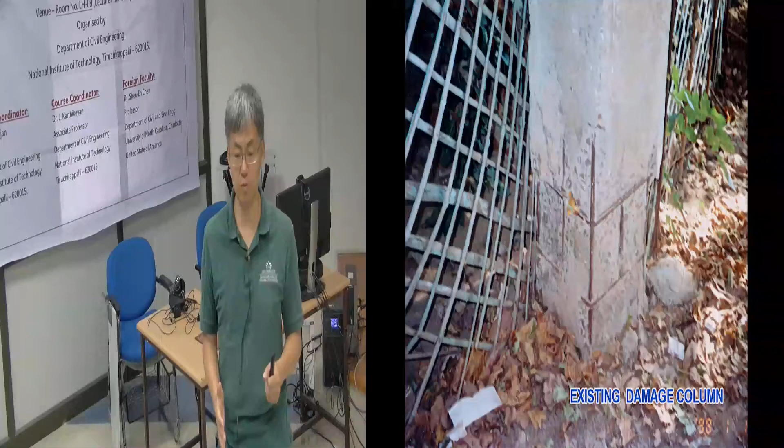So the craftsmanship here, if they pay attention, can do very, very good results. But you can see most of the concrete is gone, and all the rebars are exposed. So this may be a case where they don't have enough cover, rather than an actual rebar corrosion problem.

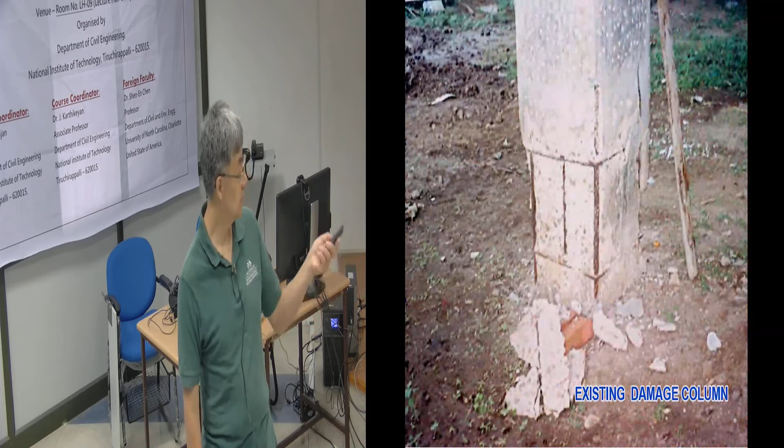In more cases, there are chunks of concrete, and we don't know if these chunks are coming from here or from above. The beams and the remaining structure, and even the bottom of the tank, all have chunks of concrete falling. So you have to do a forensic investigation to really determine where that concrete is coming from, and that is a very important part of the investigation.

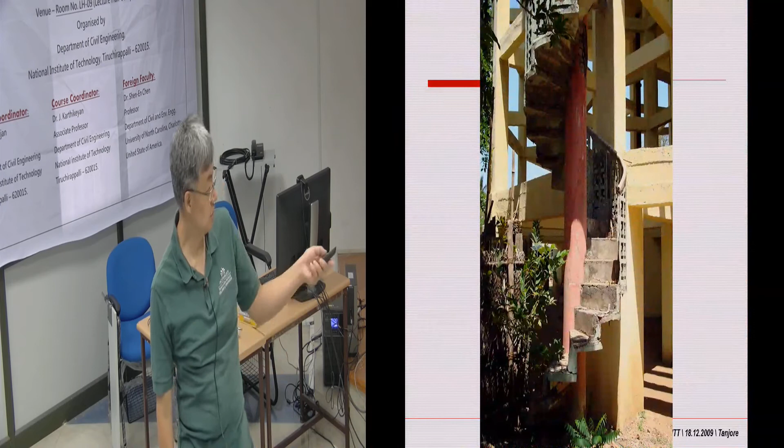This is the stairway that goes up to repair or do service to the tank. Now, compared to the beams and columns, this definitely has rebar exposure and problems. The stairway was not done as well as the structure itself. I don't know the sequence of construction here, this may have been done afterwards. Because of the geometric complexity, this may be something more difficult to construct, and that is why the quality of this is not as good as the actual structure.

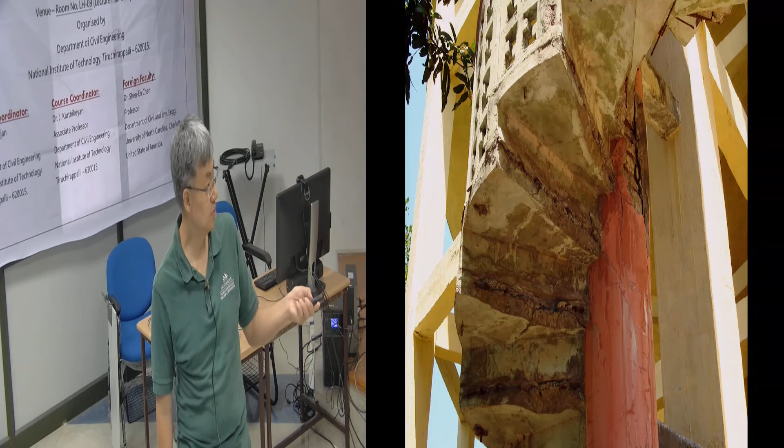And look at this. Compared to what we've seen before, this is bad concrete, and the steel was not proper either.

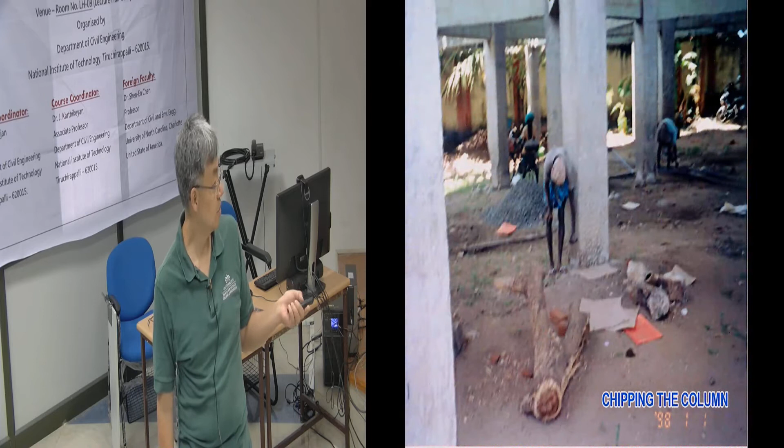So after they did the investigation, they started the repair work, and even this picture shows very good workmanship. They know that when you repair concrete, you should chip away all the old concrete, and then maybe enhance the reinforcement so that all the corroded parts are removed.

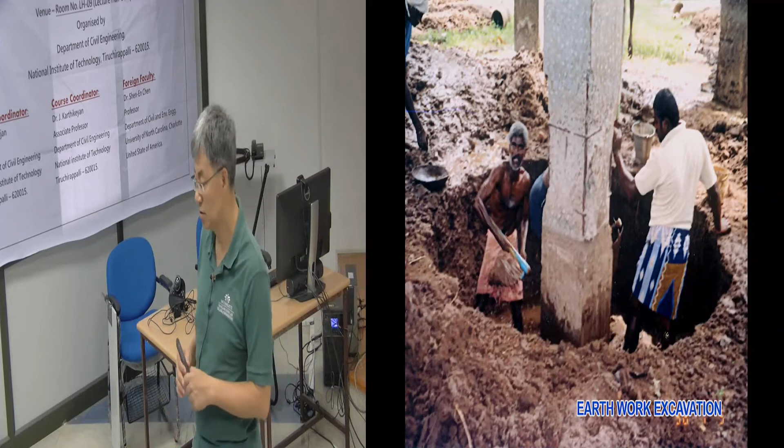And then they open up. So the recommendation that Dr. Shen gave them is actually to reinforce the columns by enlarging the columns, and the footing. So by excavating below ground, they have been able to repair most of the footing part.

Now, there is a danger in what they're doing. Notice that there is no secondary beam supporting the structure, and then they start digging out the foundations. This is very dangerous. If they start repairing all of them simultaneously, you're exposing people to danger.

So, from a construction safety perspective, this is something where they should give some prop to the columns. Yeah, exactly, some kind of prop and support. And it's not like they don't have that here, because we have seen some pictures. I think some of the projects that CN has done actually have temporary supporting. In fact, one of the failures we investigated together was actually the support collapsing, the scaffold collapsed. So you have to do everything right. But in this case, this is definitely very dangerous to do.

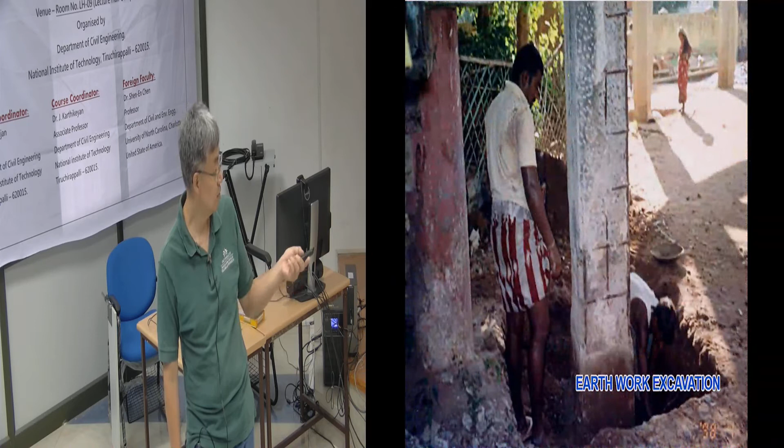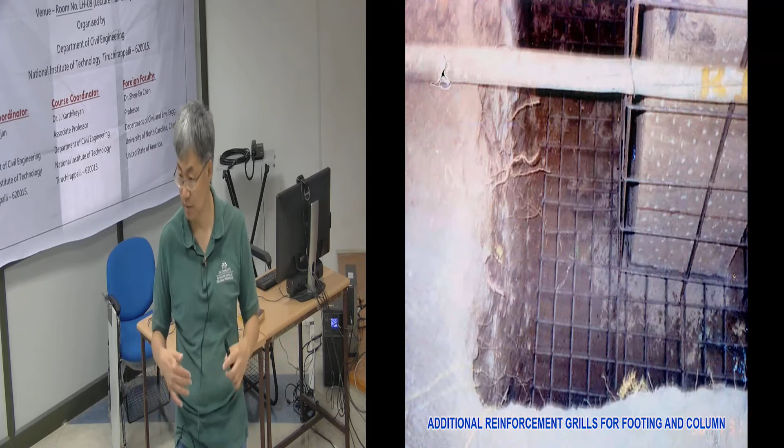And then once they excavate, you can see all these are done by hand. Once they excavate, they start laying out the reinforcements, and then cast concrete. So all these are done really nicely.

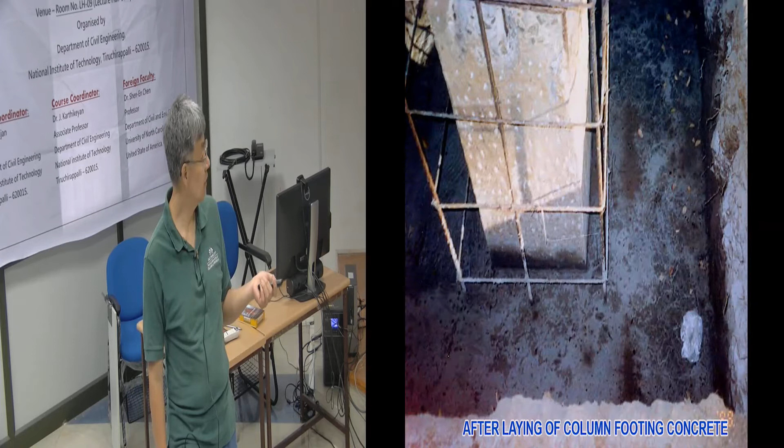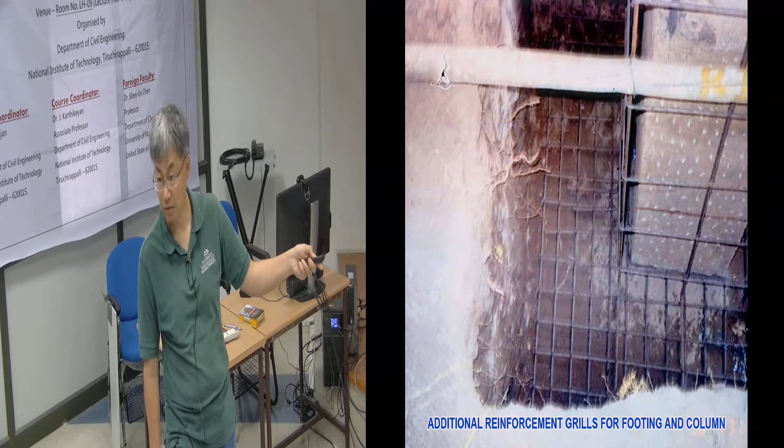And this is actually, you can see the footing concrete has already been laid. So I'm not certain, but yeah, the reinforcements are already in place, and so this is a good time to see if they have a good tie together. In this particular case, I don't... oh yeah, there is. So this one is bent L shape, so that is done right. So those are details that you cannot see until after the construction is over.

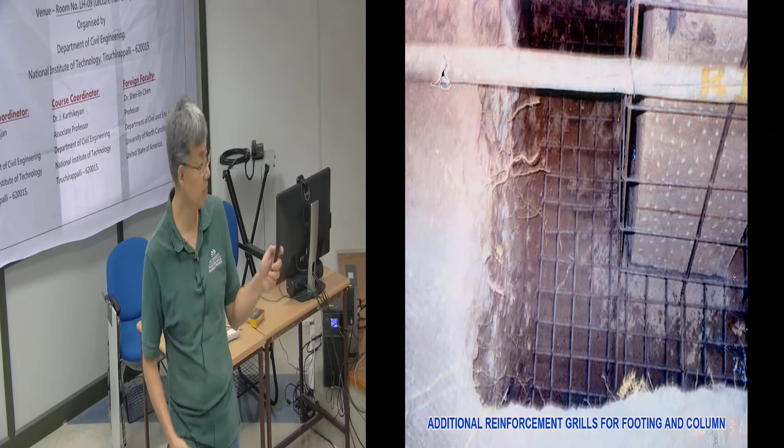So, as the engineer records, it is extremely important to document and take this kind of pictures.

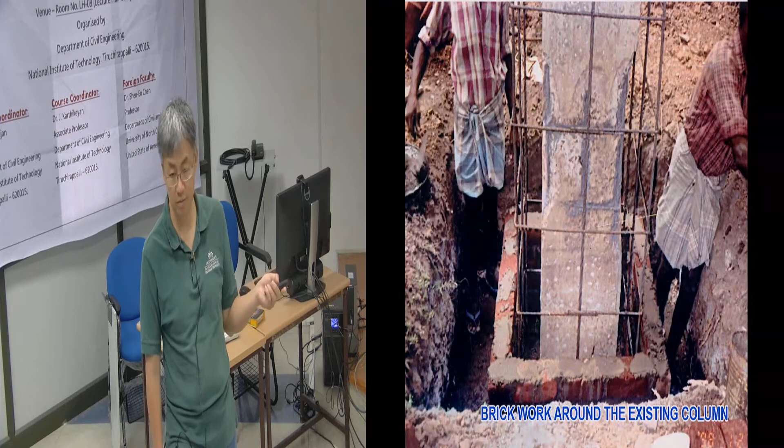Another thing is, in my opinion, considering the heavy load on top, this rebar is probably a little too skinny, you should use a larger bar. Do you agree? These rebars are too thin, in my opinion. Minimum is 12 mm, sir. But this one doesn't look like it. Is this 12 mm? It's 12 mm. In intermediate, I think it is 10. That is small. You mean the stirrups? Yes, are 10? No, stirrups will be 8 or 6. That's very small. I'm talking about the middle one, this one is a little bit thinner. So he must have given 10 mm. That he can give. The minimum should be 12. The 12 mm, 10 mm is just for some support.

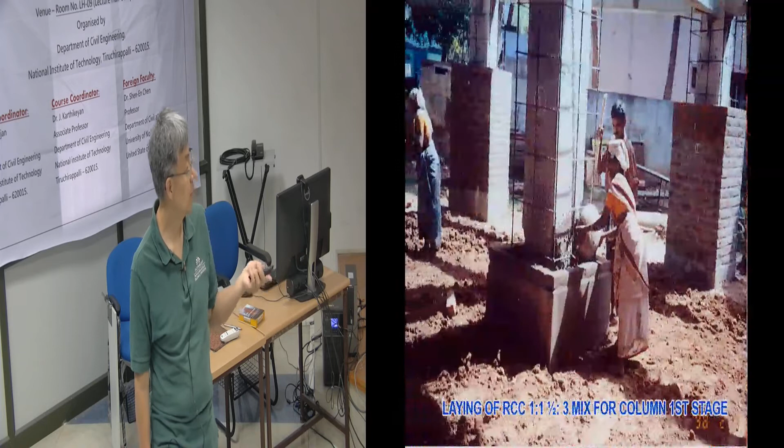And then brickwork is starting for the remaining section. Okay, and you can see concreting inside. So I don't know whether it's intentional, but you see the rough surface of the concrete—that would provide bonding for the later concrete. Yeah, it's intentional.

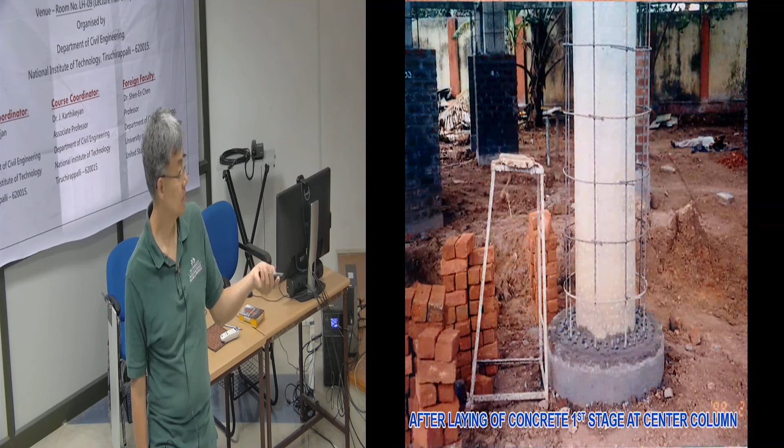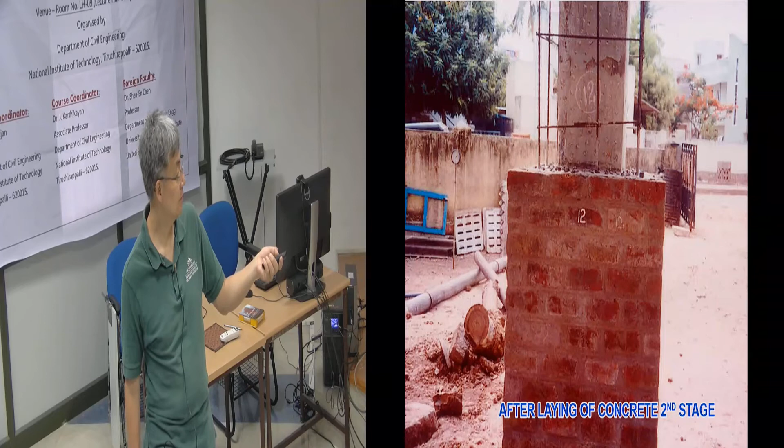Okay, now brickwork goes all the way to the top of the column. Second stage, more concreting. After the second stage, okay, finally they go all the way. They start preparing the beams.

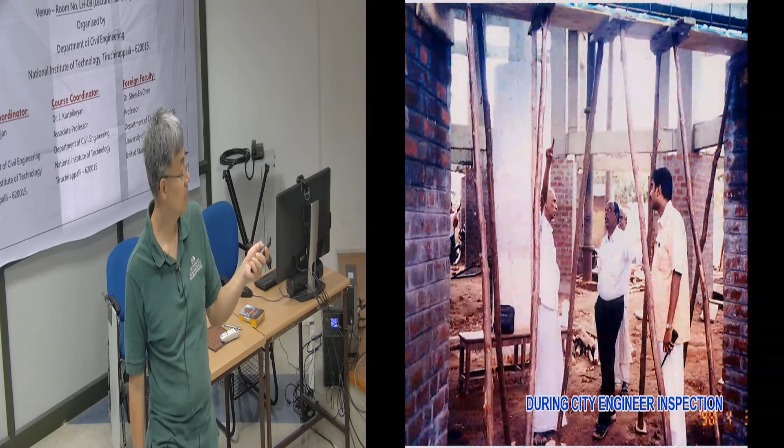And you can see the formwork that was being placed. City engineer inspection.

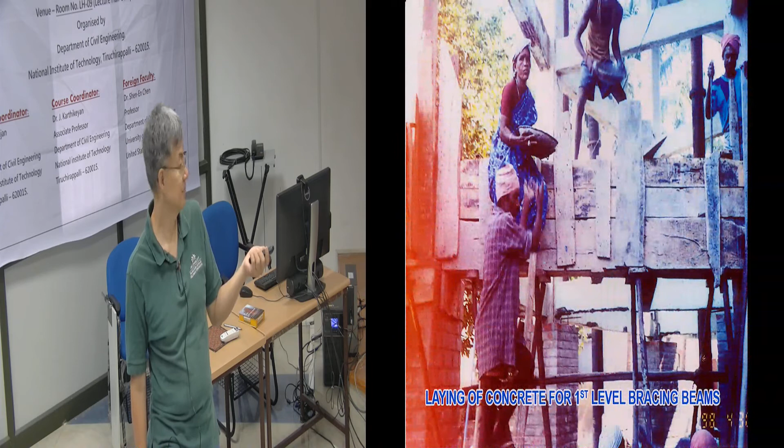All these pictures one day will be so valuable because this is what people were doing, concreting. And when I was in Chennai, I've seen some large instruments for concreting, and one day you may not be able to find those ladies that do concreting.

When I went to China in 2008, I was showing some pictures from when Chennai Trichy Road was not completed. We were driving and saw people laying concrete, putting it on their heads and dumping it. I was like, wow, in India the highways were built in such difficult conditions. And the Chinese said, that's how we do our highways here too—so I was embarrassed.

Sometimes you get this lapse of mind, but all this will go away very soon. When you guys start, maybe 10 years after their service, everything will be automated and you won't be able to find all this. So these pictures are very important one day.

When I was younger, growing up in Singapore, we had ladies that did that, and that was before Singapore was anything—just a fisherman village. Many years later, I read a book about those ladies, because in Singapore they would wear a red cloth on their head, talking about their lives. So we can see the footprints of people who led to development and advancement of a society, but all this will be historical.

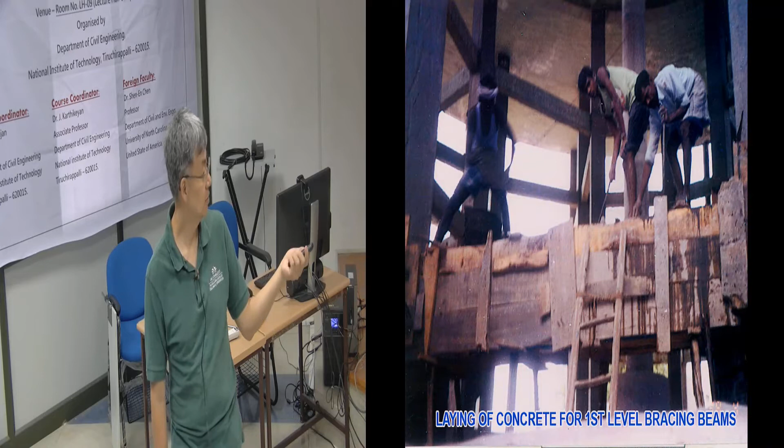And then concreting on top, on the beams, and this is after the work. So you quickly realize and appreciate very much CN's forethoughts and the design of all these beam-column connections and so forth. Okay, and it served the purpose.

And it definitely reinforced the bottom of the water tank, so they don't have to rebuild the entire water tank. Okay, so that's a really amazing project.

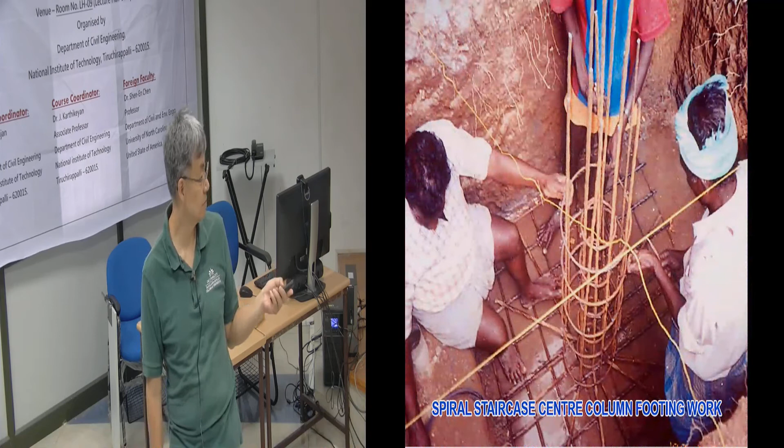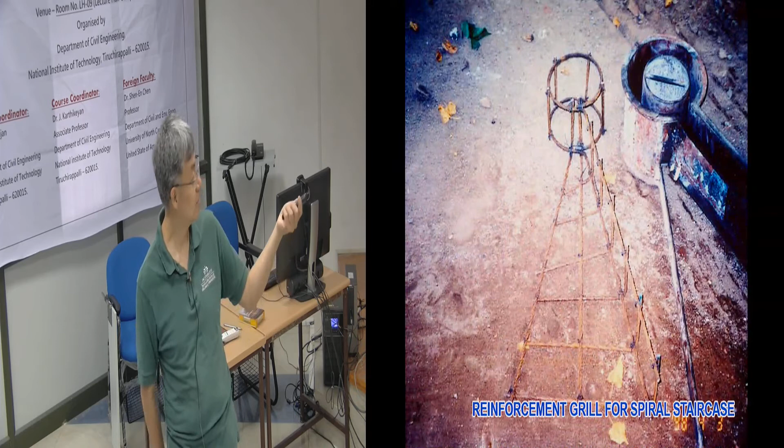Now we're talking about rebuilding the spiral staircase. Okay, so they were literally rebuilding the entire footing, including the columns. And you can see this kind of steel work is really amazing, because it takes good skills to have the welder on site doing a bent beam and make sure they have the right dimensions.

So this kind of skill will eventually be gone. In the US we don't have people doing on-site welding anymore—okay, but wait, actually, take that back. The other day when we were helping Ahmad cast concrete, weren't they doing some steel cutting? Yeah, so in America now most of this work is done by Mexicans, and they still do this kind of work.

So the lab next to my lab, they are doing some grading, digging out the foundation for building a strong footing, because somebody is putting a centrifuge for geocentrifuge testing, and they have to do all this work by hand. So yeah, most Americans will not do it—they have to hire the Mexicans.

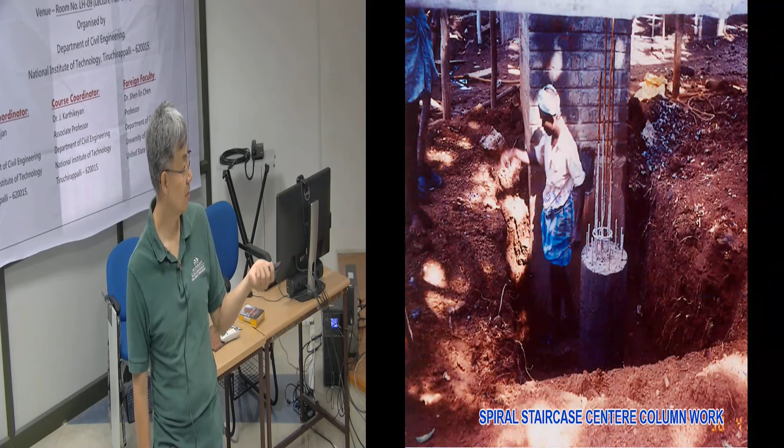Okay, and then start constructing the staircase. Okay, you can see the columns being formed, and then they start erecting the spiral staircase.

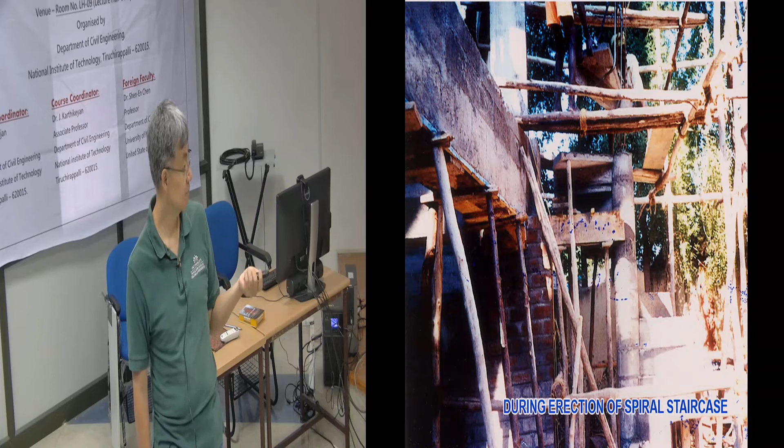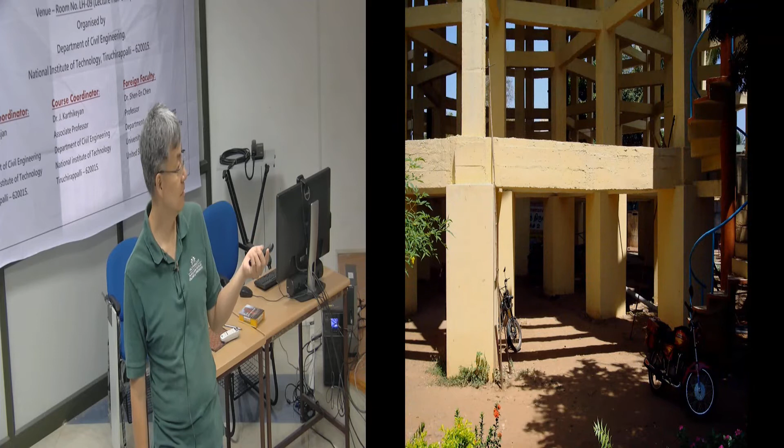And then the completion—you can see the amazing craftsman work that has been put into the construction of this spiral staircase. Okay, and then they cement and paint the surface to make it look nice, and this is the result. So this is really, really special and unique repair project.

What is this thing? Water level. Water level? Oh, okay.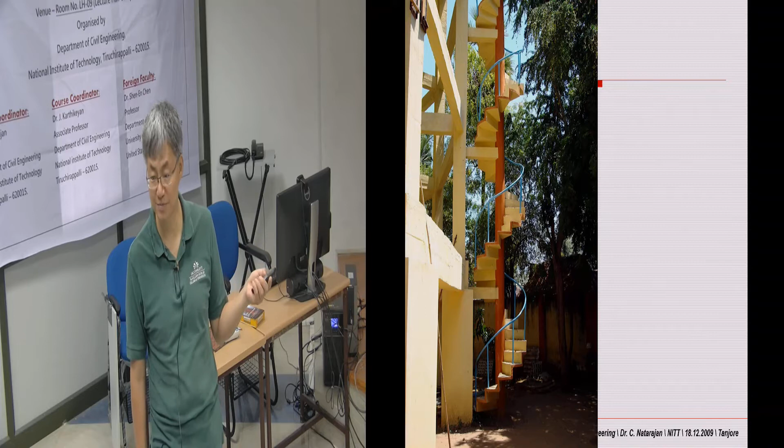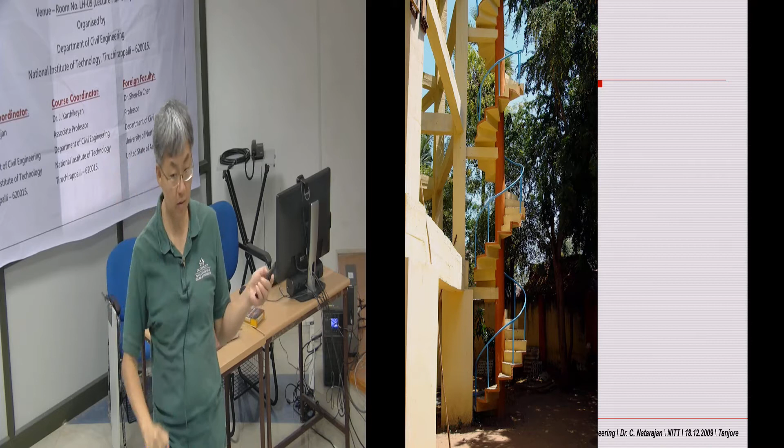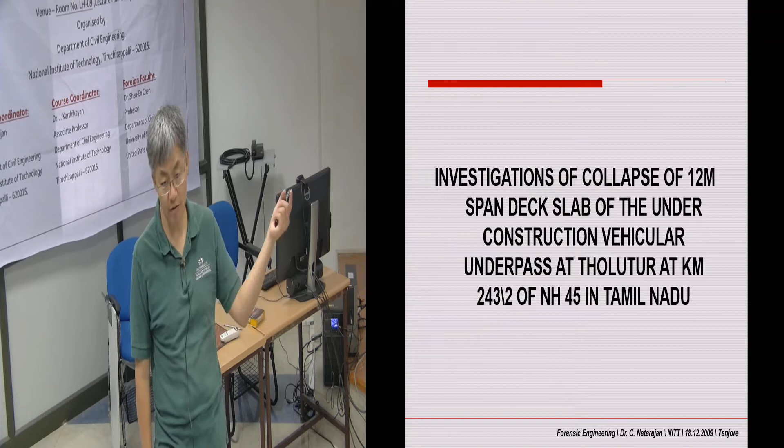So probably the water is coming from Cauvery River. It will be pumped.

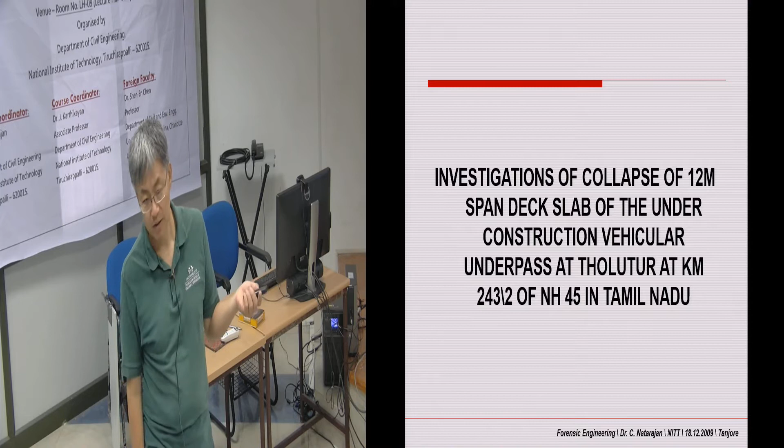The next one, I think this is done by Ramesh and Shen, because we don't have all the pictures, but from the pictures I've seen, both of them were shown in the picture. Is this Tanjore Highway? No, Professor.

No, it is in Chennai. Chennai Highway, there is one place called Tholutur. That underpass got collapsed, because of the poor formwork.

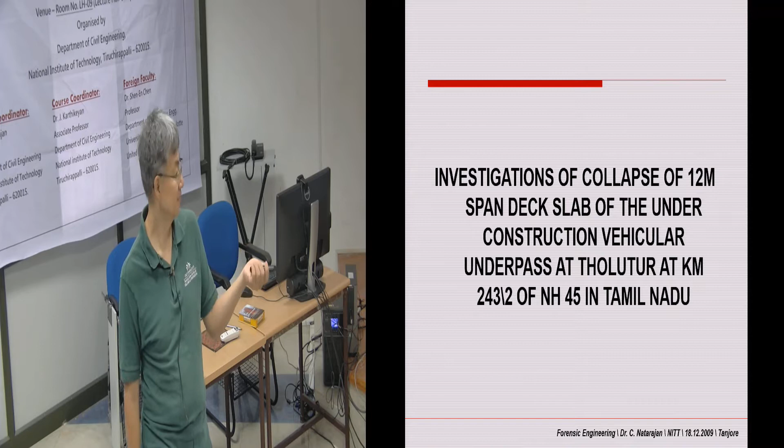Poor construction and poor concreting. Mainly the formwork failed. Okay, so it was during construction.

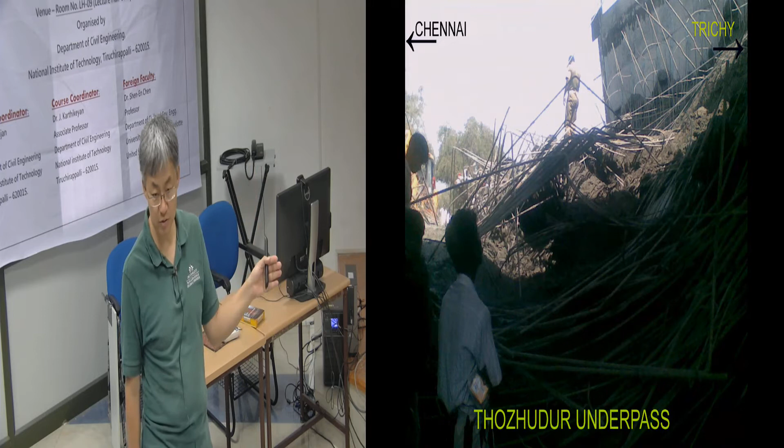And one of the things I was trying to understand, this must be concrete, right? All this debris, the rebars, massive amount of rebars, but this must be concrete. Poorly formed concrete, right? They didn't have enough.

Seems like they don't have enough water, right? Is that what this is? Because they don't fill it with soil, do they? Like in the construction. For this underpass, it should be concrete only. Concrete only, okay.

Yeah, you see the failure of... so some of these are - oh wait, so these are wood, right? Formwork, like bamboo. Rebars, the rebars have fallen. Yeah, but so much rebars.

What I have heard is that the side wall being constructed was not given enough curing period, so the strength was not developed. Then they started casting the deck slab also without proper curing.

So what happens, this side wall gets collapsed. So the entire thing was... okay, and so the concrete wasn't even hardened. The concreting is poor.

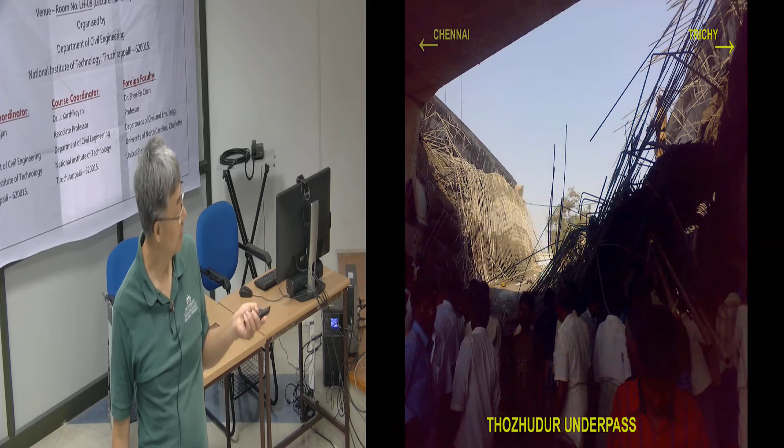You can see the thing. Okay, now it makes a lot of sense. So these are really rebars that go this way, but the whole thing collapsed.

Anybody die? No, don't know.

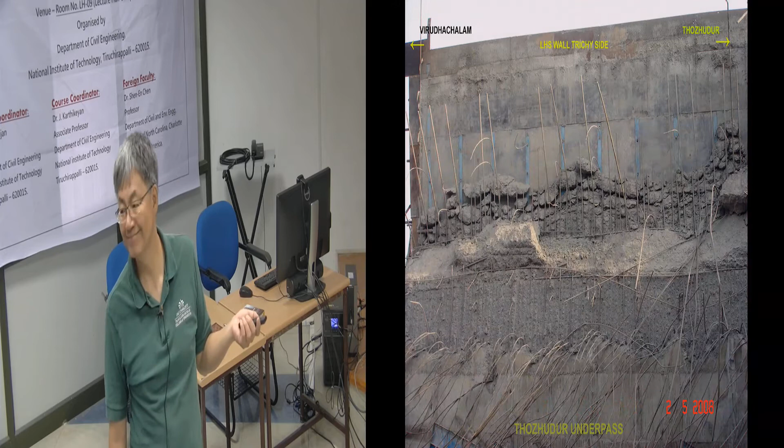This time I didn't join, Professor. I was in IIT Roorkee. You were not here yet at this stage. I was doing my PhD there.

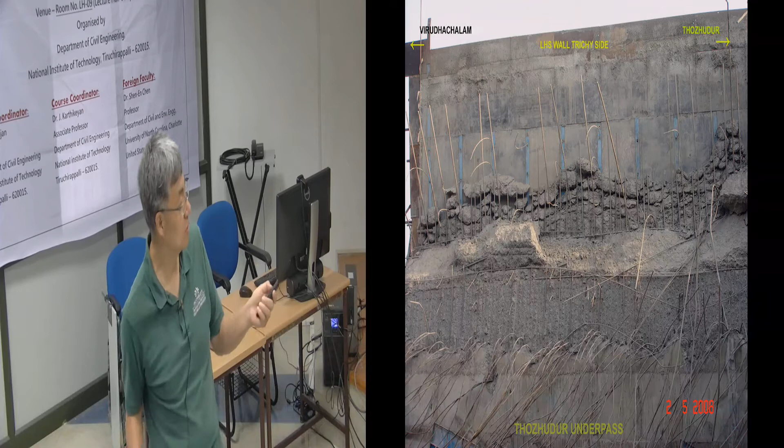Yeah, see the rebars protruding from the side. So the bridge deck, the car is traveling this direction. So this gray wall is the sound barrier.

But even the construction process makes me wonder. So the deck, where's the supporting beam? There's no, it's like a box.

The underpass, Professor, like how our NIT Trichy entrance has an underpass, it is the same like that. So it was box culvert, cast in place. Yes, that is, I see.

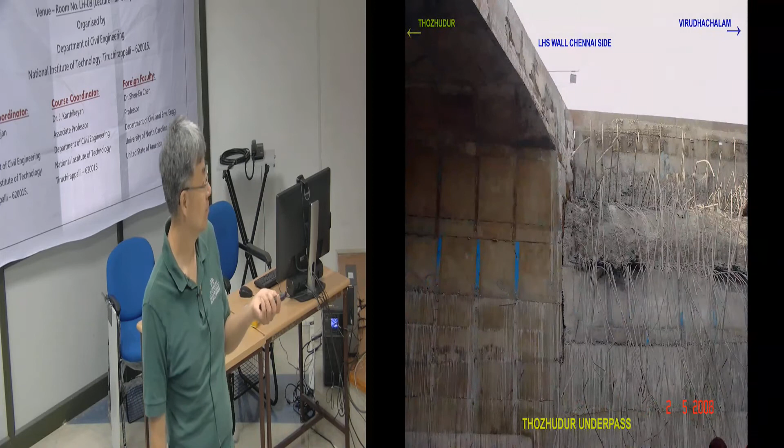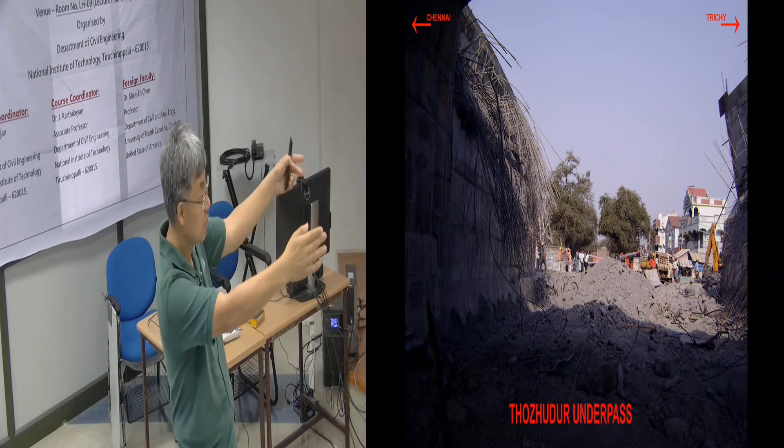I think it's also a connection issue, Professor. You can see the joints, everything, the vertical wall was not constructed properly. Right-hand side wall. That's one of the things. That's why the bars are all tangling. Yeah, that happened at the time of construction only.

So how many days are required since the wall has been built? The box part of the wall is built, right? Or are they going to put more walls? Because the one that entered campus is very narrow, but this one looks pretty wide.

So they will build that more. That one is not planned properly. Planning, lots of accidents. Right, we have to be very cautious when we turn. Go in, there is no out, proper turning radius. It's very narrow. We don't know what's coming on the other side.

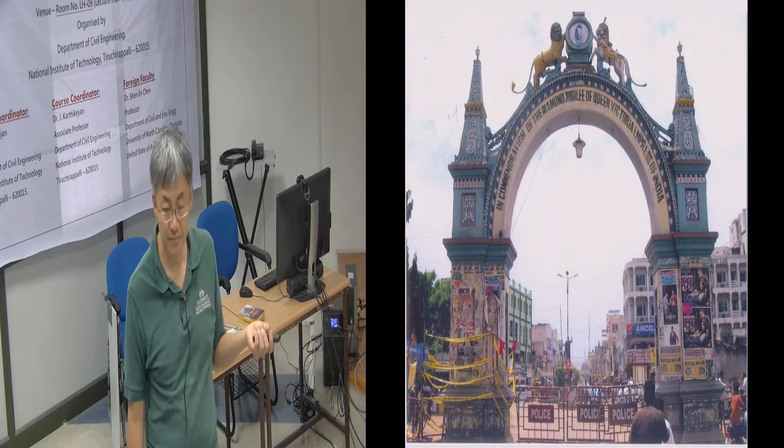Okay, so I'm trying to find out more. Maybe you guys can help me refresh my memory. So this is another case study that CN was showing.

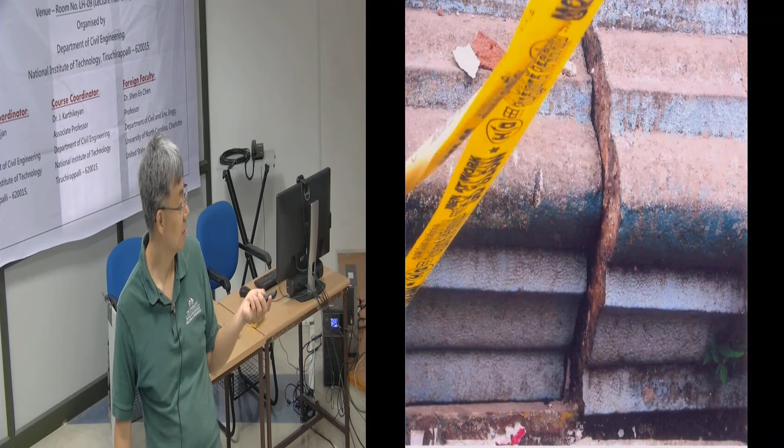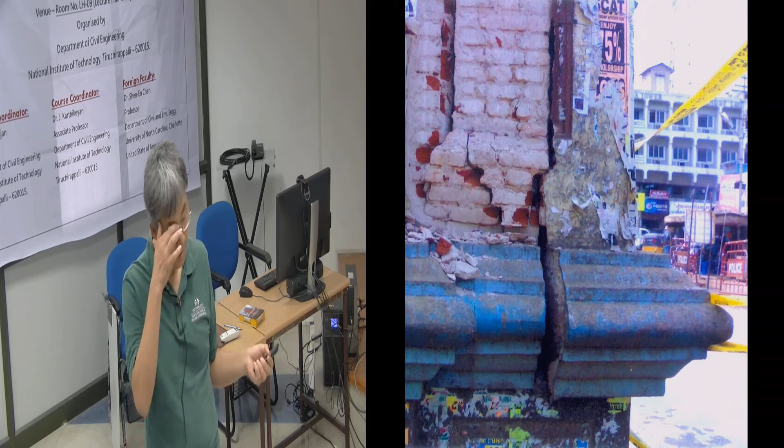This is in Pudukkottai, Professor. Actually this is around 150 years old, a monumental arch. During the Queen Victoria period, that was 1858, in India when the British ruled. So they made a monumental arch, full of brick masonry. Arch brick masonry, so due to the aging of the structure, it was bound to demolish.

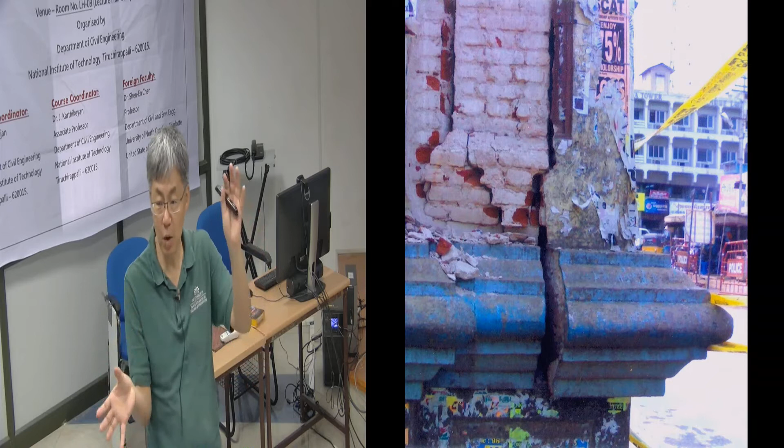Yeah, so finally they demolished this. It was totally unsafe. It's a symmetric structure, right? Yes, and why did this side start cracking and not this side?

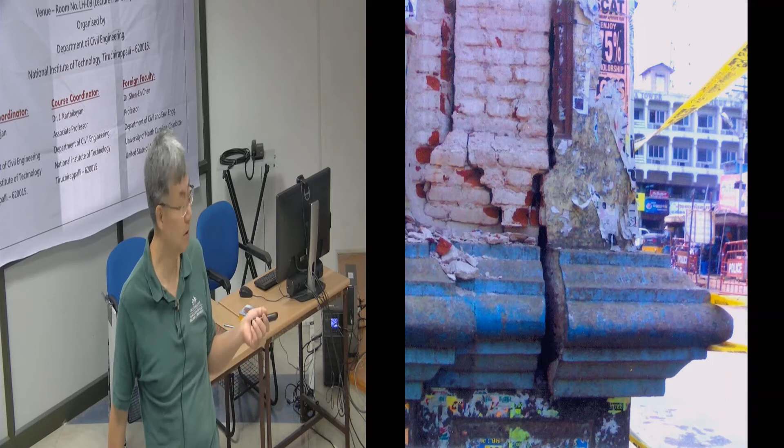It's the same one we saw for that Napier Bridge yesterday, where we saw the big piers which cracked, right Professor, in the exact same fashion, because the brick...

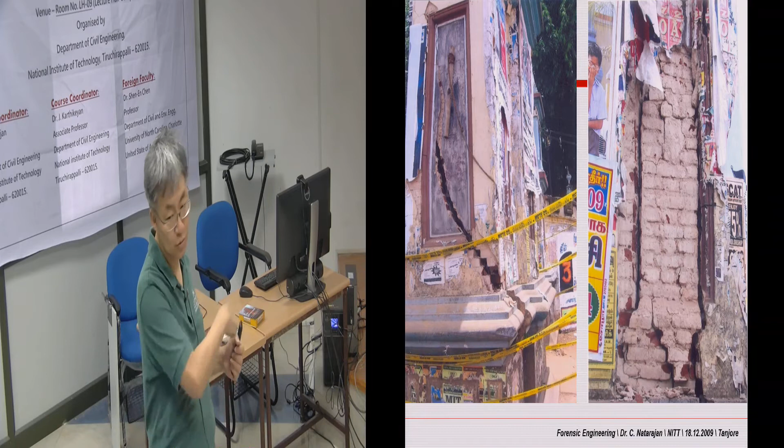Is this because of cars hitting? I heard it's only one lorry side, not both sides. I heard one lorry hit this, and that time it got tilted. But this is definitely a structural failure.

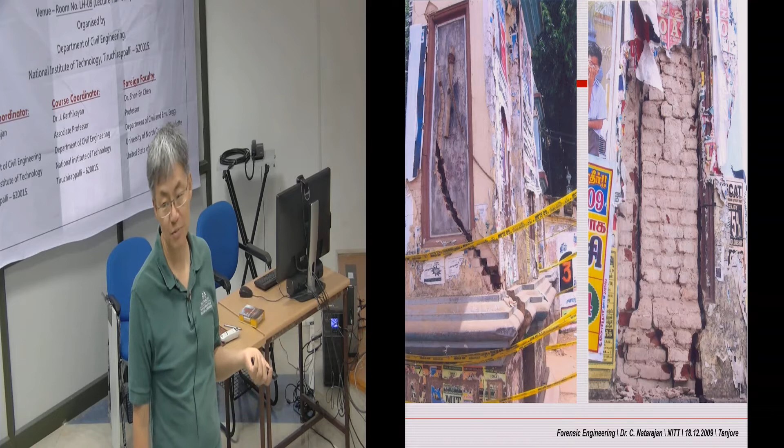So you can see on one end you have this big shear crack. The lorry came, hit the wall, and it got propagated. So they demolished the whole structure. We cannot repair, Professor, it's very difficult. Bricks are very difficult to repair.

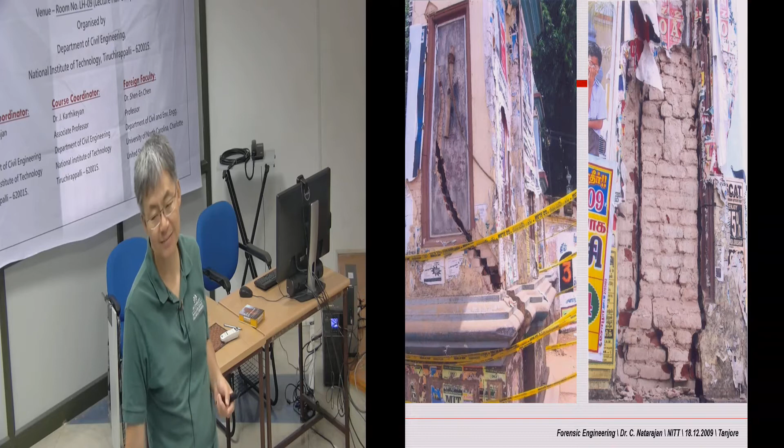But can they not use steel, just tie it together? But you will lose the elevation, Professor, you won't get the elevation right. And that too, the crack is very vulnerable, so they demolished it.

Yeah, that's why I was trying to Google. The lorry fellow hit this, that's what I came to know. What happened to the lorry fellow? I remember long back he was saying a lorry, a truck driver, came and hit it in the night, and then damaged the pier. But was the guy drunk? This one was not.

From this picture, usually I thought this kind of structure would be built on an elevated platform, so when he drives his lorry he would have felt bumpy before he hit the structure. He must be really drunk or really sleepy. Normally drunk driving is very common here, very very common. 2 o'clock midnight means either he must be sleepless or he should be drunk.